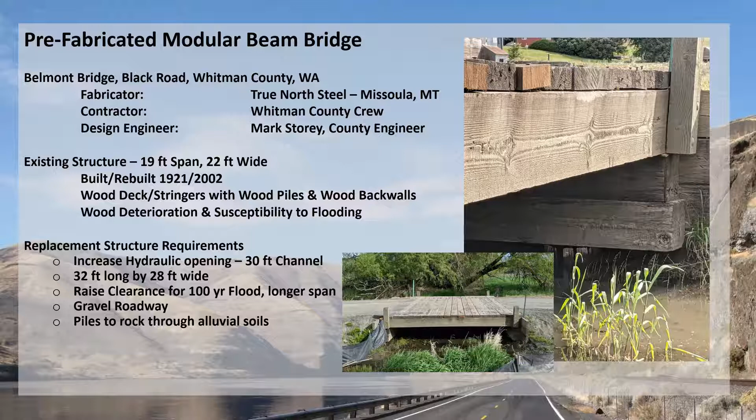One of the goals of the replacement bridge was to open up the channel wider than it was and raise the bottom chord of the bridge to get it above the 100-year floodplain. Whitman County has a dedicated bridge crew of 5 people and has the equipment and experience to replace small bridges with county forces. We've been doing this for many years.

Until recently, the county has traditionally constructed concrete superstructure bridges and only recently switched over to steel superstructures for much of what we do. The county builds the foundations and all the site work and contracts for the casting and the delivery of the pre-stressed concrete, or in this case, the manufacture of the steel girder superstructure.

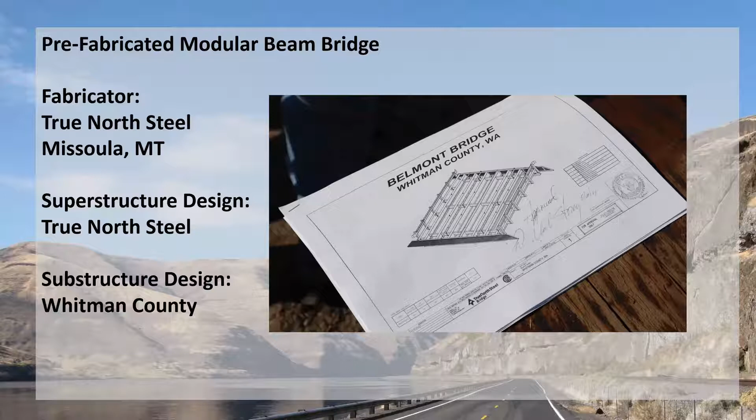For the Belmont Bridge, we competitively bid the manufacture of both the steel and the concrete. The successful bidder and the lowest cost was True North Steel with a steel rolled beam structure. True North Steel is out of Missoula, Montana. Another nice thing to note is that when we bid these out, we asked for the manufacturer to actually produce the shop drawings and stamp them.

So here's a couple of pictures of us taking down the old bridge. Basically, when we removed the old structure, the county forces try to isolate the area of the construction and make sure that we're not dropping a lot in the creek. It's impossible to do that perfectly, but there are a lot of real requirements on that by Washington Fish and Wildlife. So we do our best to isolate the site.

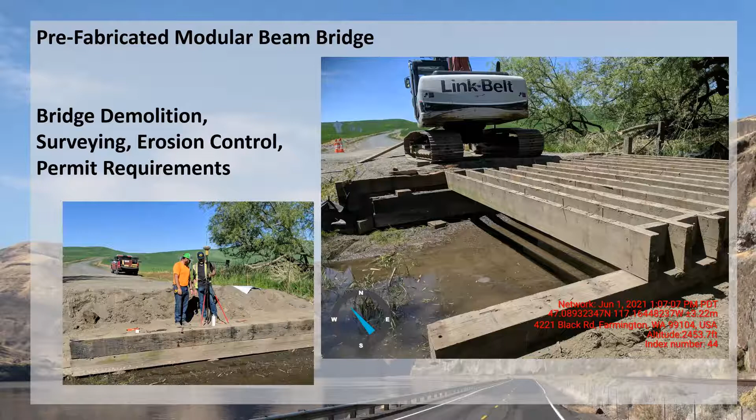So Whitman County has been building bridges using county forces for several decades. County forces are capable of building bridges up to about 60 feet in length. This is a practical limitation just because of the time available. The same people that build bridges also maintain our bridges. We have over 300 bridges to maintain, so it's a big time commitment.

Typical earth materials consist of soft, firm silt and clay alluvial soils overlying basalt bedrock. The alluvium is not typically suitable for support of the structures, particularly when considering scour potential. Therefore, most of our bridges we support using H-piles driven into the basalt bedrock underneath. The depth of the basalt is usually between 5 and about 30 feet, although we've had a couple of them show up at about 70 feet, which surprises us a bit.

We found that it's a lot cheaper and simpler to just drive steel piles to bedrock and then build tieback anchors as mitigation if the final bearing depth is not below the scour areas. About 10 years ago, the county upgraded to a hydraulic pile driver that is mounted to a large track hoe to install the piles. You see the picture of it sitting right there doing this Belmont Bridge. The number of piles is determined based on the anticipated loading and the length of the bridge.

Sorry, I have to use my paper because my screen is doing weird things.

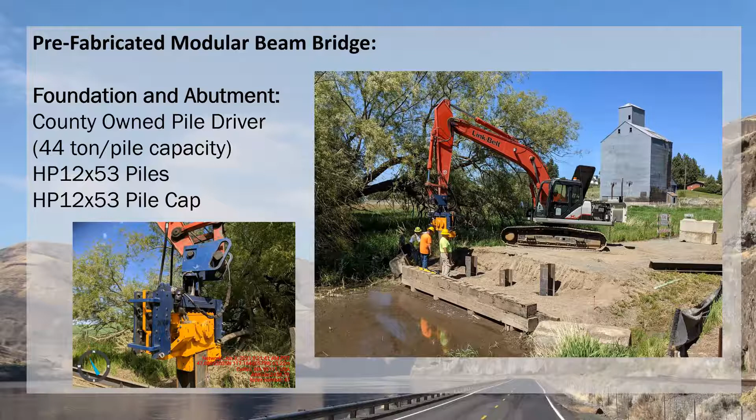For the abutment pile cap, rather than forming and casting concrete and waiting for it to cure, the county installs a top plate or a pile cap using the same size H-pile that we use to drive the piles. You see pictures of it there. Then we use a steel back wall installed behind that to put the backfill up against, and then we compact structural fill behind that.

This is a picture of basically the final product just prior to putting the bridge on it. By making the bridge longer than the old bridge, in fact, I'll go back just a little bit, and you'll see right there we're driving piles right behind where the old abutment was. It makes it very simple for both safety on the job site and for construction.

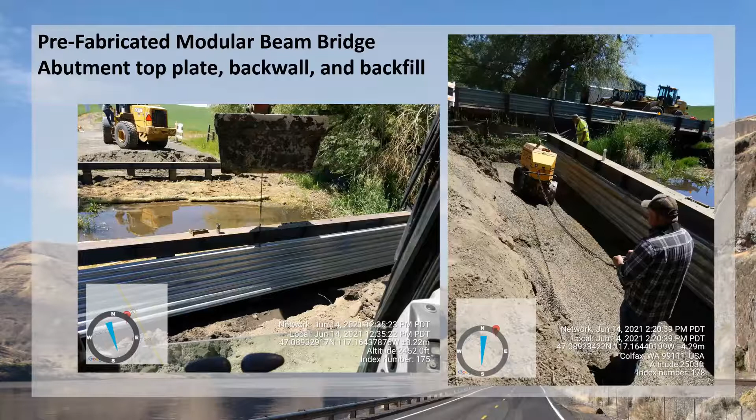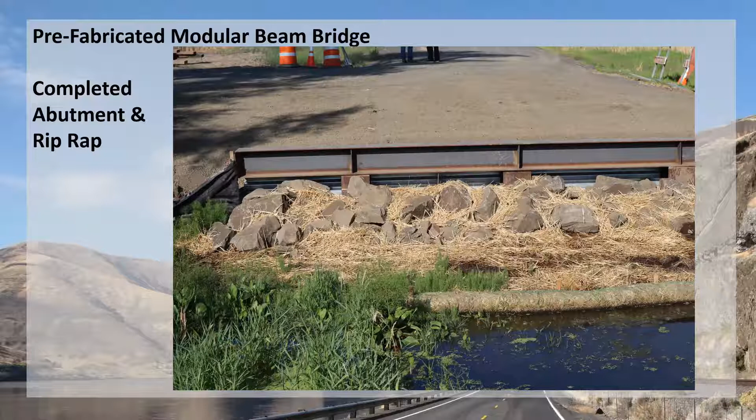This simplifies all the requirements from Washington Fish and Wildlife as well. So it's really simple when we can isolate ourselves from as much of the stream as possible. After the piles and the pile cap are completed, the old foundations can then be removed with less disturbance to the channel, and then riprap is installed.

So the final dimension of the superstructure on this project was 32 feet long by 28 feet wide. So the bottom of the new bridge needed to be raised above the creek further than the original wood bridge. So the road was raised about 2 feet to accommodate the new superstructure. The modular rolled beam steel bridge consisted of 3 modules that could be shipped to the site on 1 truck rather than 3 trucks as we used to do with the old concrete bridges.

Selecting a bridge structure that can easily be handled by 1 or 2 excavators significantly reduces the overall project costs and shortens the construction times. You can see here we're able to use a large loader and the trackhoe to basically put these modules into place. They're lightweight enough to do that with county forces and county equipment.

Each module had 2 or 3 weathering steel rolled beam girders fully assembled and a corrugated steel deck and side dams attached. Now this is easy for placement of gravel riding surface. You'll note in the picture on the right, you'll see a steel rod right on top of the corrugated deck, and that's basically grader rails for when we put gravel over it later on.

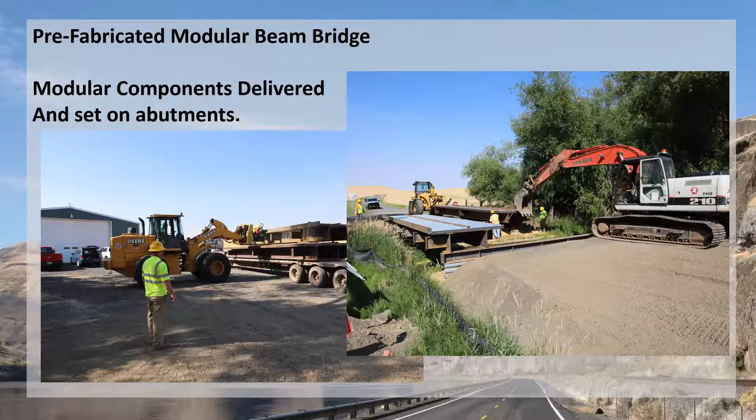There's a couple of pictures, and there's a great picture in here. If you look in the upper right, there's Dr. Barker actually working on our crew. We decided not to rehire him this year though, but just to prove that he does know how to use a pry bar.

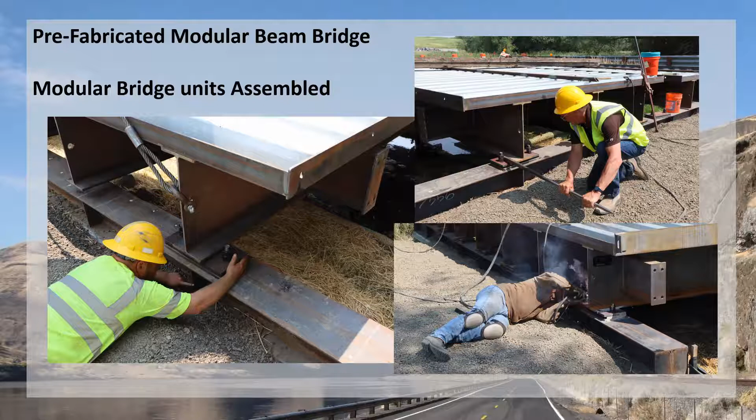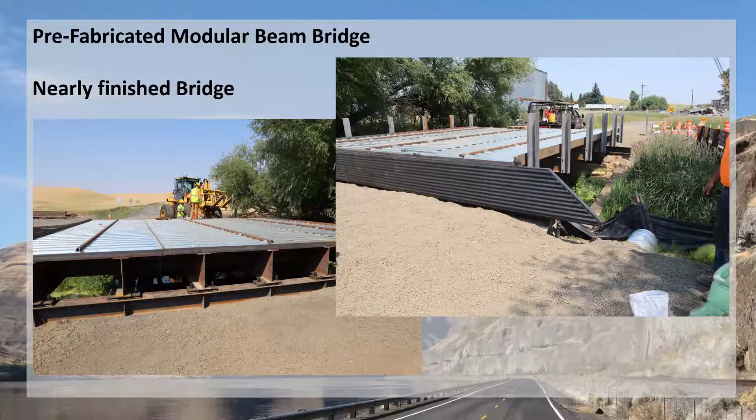So here's just a couple of nice pictures of the bridge sitting on top of the foundations. You can already see the restraining anchors put in place on the left, and then on the right you can see the fully installed modular pieces before we put any gravel or do any backfill to it. We did have to fix that right corner that you can see in there. We had to put some gabions in there to retain the soil.

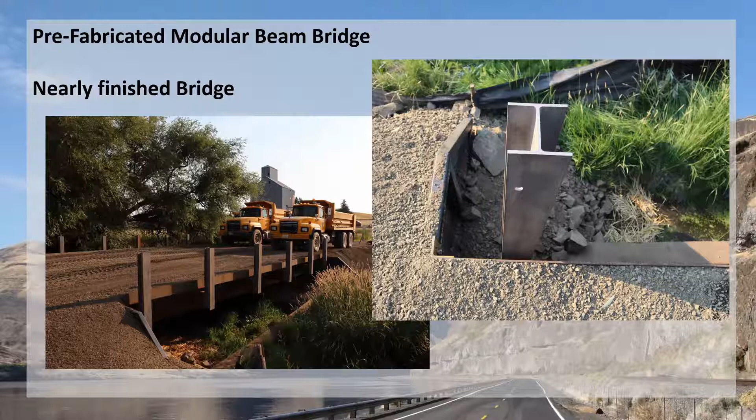Here's the next picture, adding the fill to the bridge. This was on a gravel road, and so you can see the gravel goes right across the deck. And this is prior to installing the guardrail on there. And you can see the soil spilling off to the right. So it gives you a sense for how easy that was to put together once we had all the pieces in.

In addition to the direct cost, there's always indirect costs associated with the bridges with their different superstructures. With a concrete superstructure option, Whitman County would have to hire a crane service to lift the concrete girders into place. With the steel modules, we did not need to hire crane service. Crane service in our area usually runs $4,000 to $8,000 per spot, and that's assuming good access. The steel girders can be lifted with the county forces, just getting rid of all of that.

And it also helps quite a bit with scheduling, because I don't know how many of you work with crane services, but scheduling them can sometimes be a 1 or 2 week option just to get them into the right spots. So this Belmont Bridge, the total cost of this project was about $168,000. If you look at the cost breakdown, these are just rounded numbers. The steel superstructure was about $50,000 delivered to the site. The concrete superstructure alternative would have been about $85,000. So that alone was about a $35,000 increase had we gone with concrete.

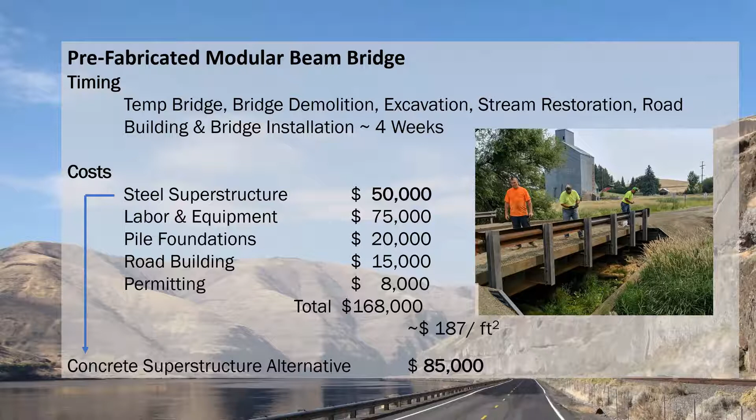So we used to build exclusively with concrete. We believed it was a better product for a lot of years, and I think we have taken a little bit of time and rethought that. We now believe steel might be the better option for what we're doing, although any specific location you're going to want to look at individually to see what's the most applicable.

So the Belmont Bridge was completed during the summer in accordance with our permit from Washington Fish and Wildlife. It took about 4 weeks to complete and then was open to traffic. There was a little delay in there for some internal issues, but the 4-week period was the total time building the project.

The work included the installation of a temporary detour bridge, which is a single-lane steel bridge that was purchased about 8 years ago and used on all our construction projects for small bridges. The stream site isolation, erosion control measures, pile installation, pile cap installation, welding of the seismic anchor clips, the placement and completion of the superstructure, and all of the associated road building activities were all within that 4-week period. I think I already talked a little bit about that. We did a competitive bid on the superstructures, and that was the difference of 35,000.

By the way, that's my bridge crew. They're just regular guys that know how to build things.

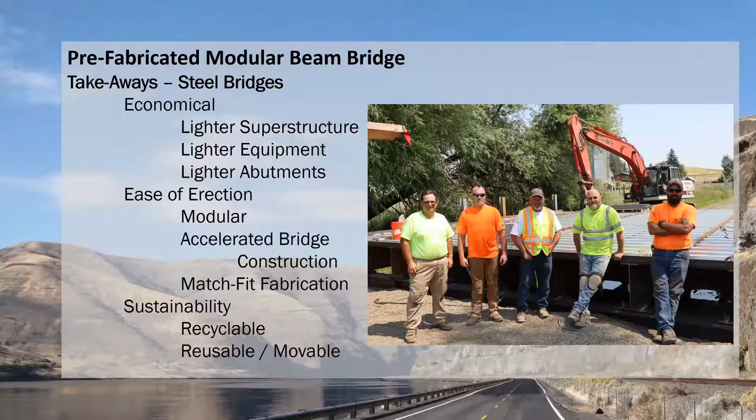So for a couple of quick takeaways, the steel bridge superstructure costs are competitive with other bridge materials. We found that to be very much true in the last couple of years. They can easily be constructed with county forces without specialized skills. They're lighter weight, resulting in economies in required construction equipment and substructure costs. Steel modular bridges allow for ease of erection, faster erection times, and the modules fit together great due to the quality of the shop fabrication.

For long-term maintenance in this bridge especially, the steel deck girder rails allow for the gravel road surfacing to go clear across the bridge, which makes it far easier for us to maintain a gravel road like this. I don't know who else maintains gravel roads with bridges, but the maintenance crew always has a hard time when they come up against a concrete deck with a gravel approach. So anyway, that is my quick and dirty presentation.